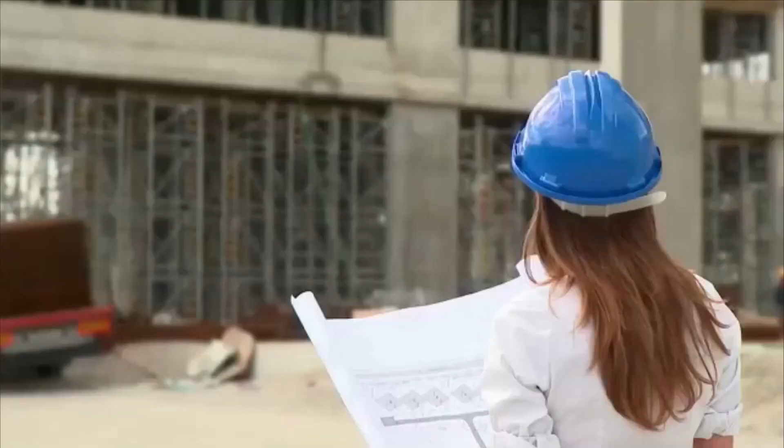The formation of these islands involves a lot of planning and designing, and this may take several years of planning and consultation. Civil engineers, architects, and town planners collaborate to draw out plans that would make the island sustainable, aesthetic, and functional. This stage includes the assessment of the environmental effects, the evaluation of the project's viability, and the creation of the project's prototype in 3 dimensions.

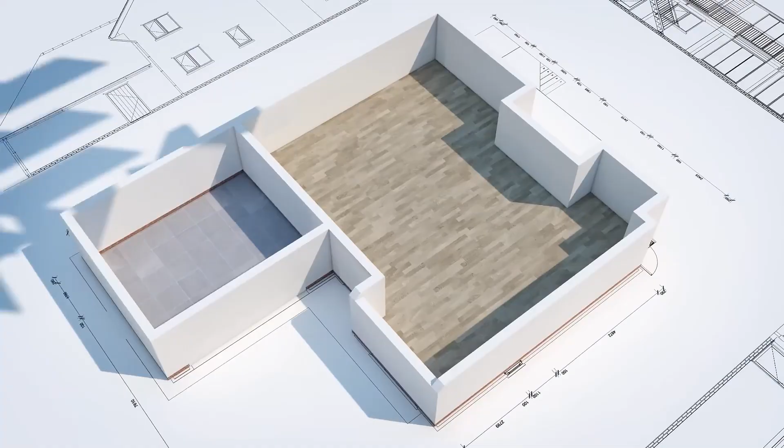For example, the shape of Palm Jumeirah is in the form of a palm tree to ensure that as much land touches the water as possible, and also to develop a unique structure that can easily be seen from space.

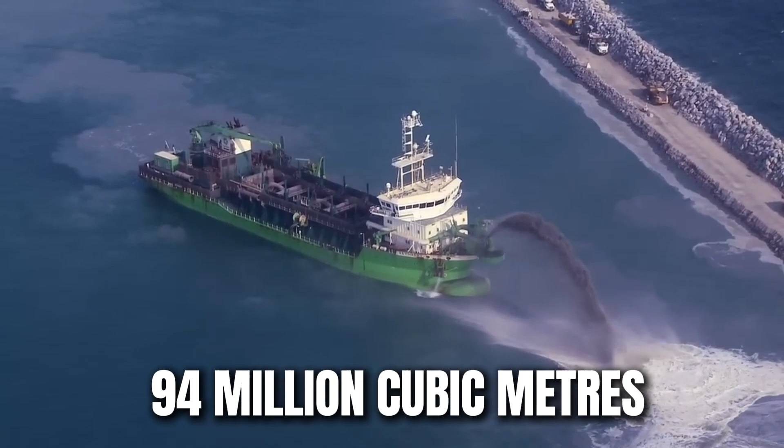After the designs, the next process is land reclamation, which is the process of creating new land from the sea. This is done by taking sand from the seabed and then pumping it to the required area, known as dredging. In the case of Palm Jumeirah, more than 94 million cubic meters of sand were taken from the Arabian Gulf.

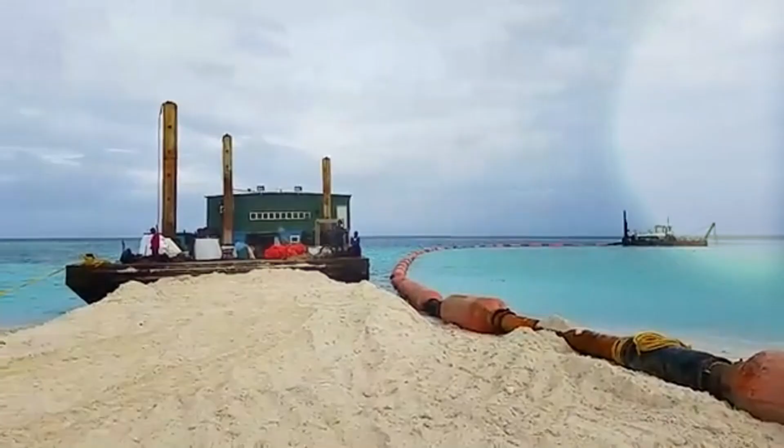The sand is then sprayed on the site through a method called rainbowing, which aids in shaping the island. In order to prevent the newly formed land from being eroded or attacked by storms, rocks are arranged in such a manner that they surround the sand.

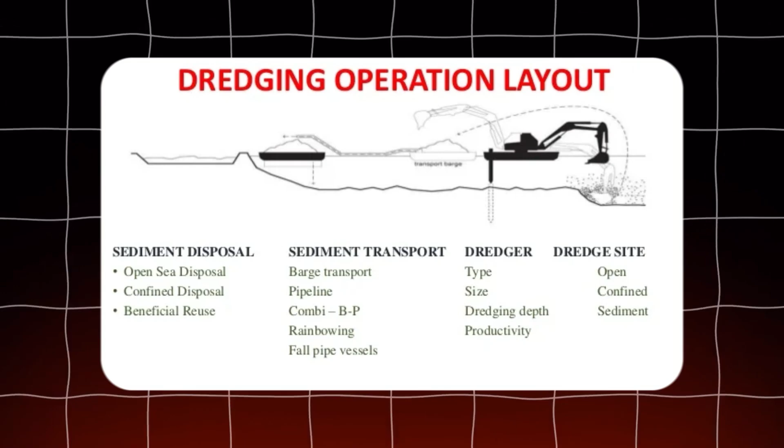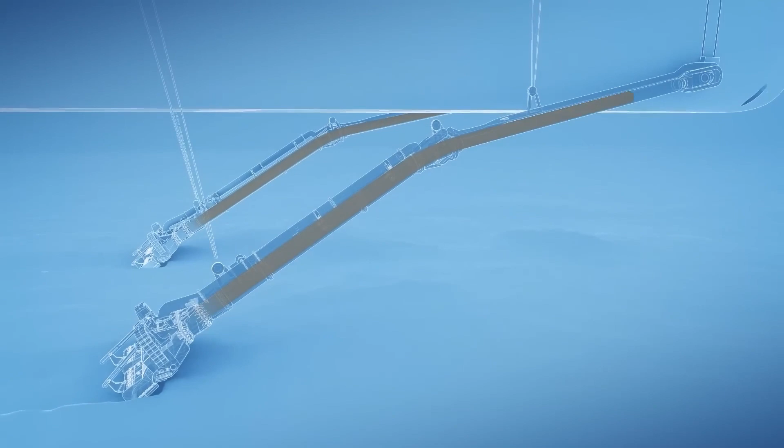Dredging is a very technical and intricate process. There are specific boats called trailing suction hopper dredges that are used to scoop sand from the sea bottom. These vessels have suction pipes that suck sand and water and transport them to the reclamation area. The sand is then deposited in layers, and this gradually forms the land.

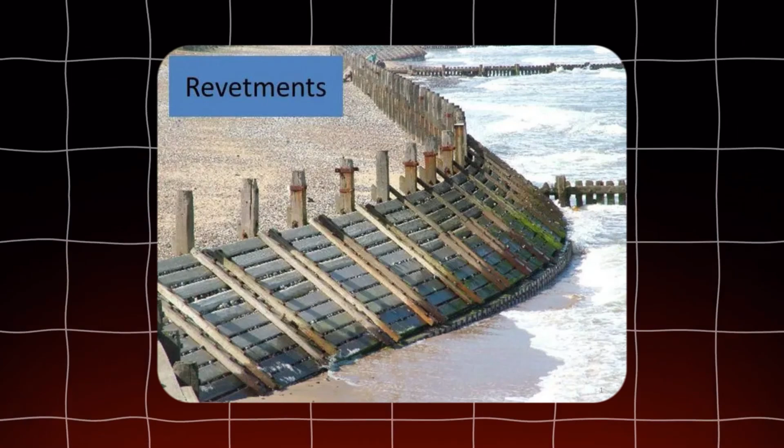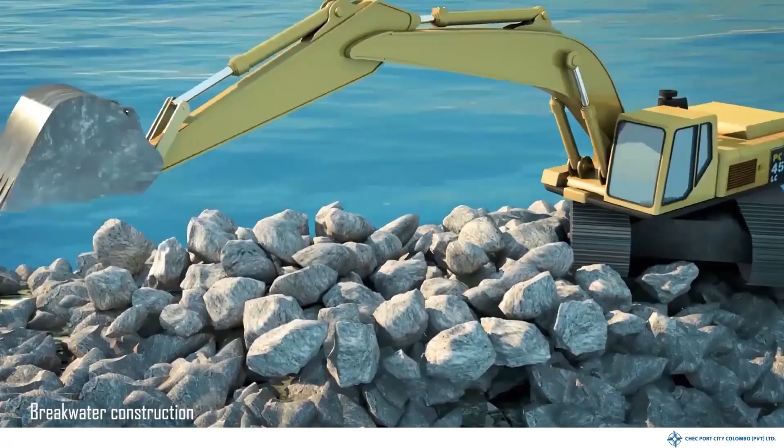This term is derived from the manner in which the sand and water mixture is sprayed to form an arc like a rainbow. The rock barrier constructions are well engineered. These are barriers commonly referred to as revetments or breakwaters due to their importance in protecting the islands from the force of the sea. The rocks are chosen in a proper manner and placed so that they can effectively reduce the wave energy and thus avoid erosion of the artificial land, while also offering long-term stability to the artificial land.

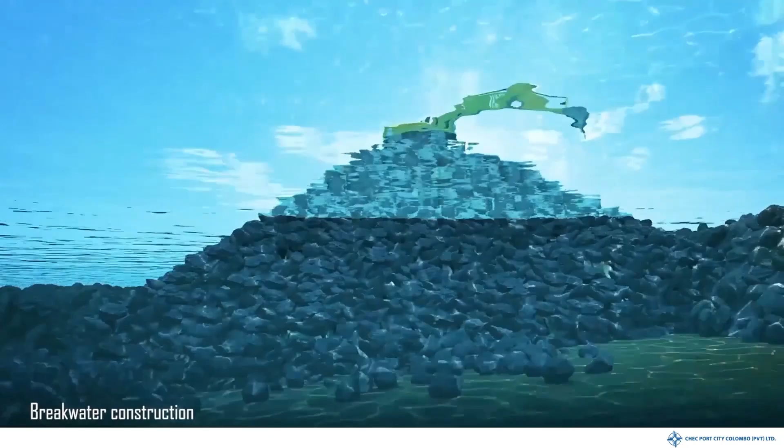After the formation of the basic landform, attention is turned towards the construction of the infrastructure. This entails the construction of roads, bridges, and other infrastructural facilities like water, electricity, and sewage systems. Sophisticated technology and construction techniques are used to enhance the durability and sustainability of the buildings.

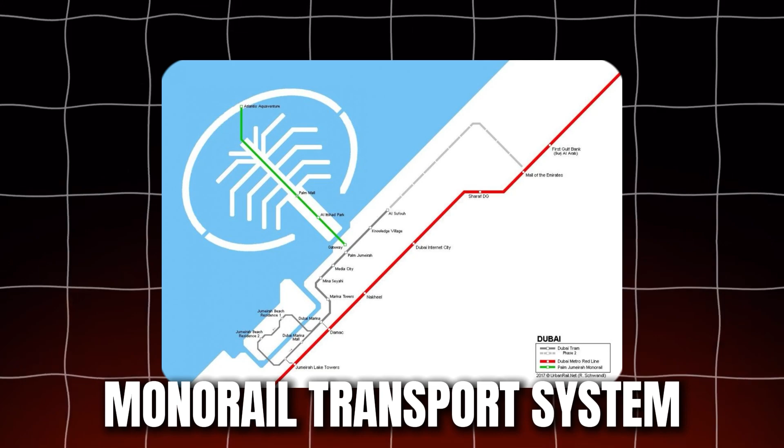For instance, Palm Jumeirah has a monorail transport system that links the island to the mainland, making it easily accessible to the people staying there as well as tourists.

Construction on such terrain is not easy because the land is reclaimed from water bodies. The engineers need to take into account the settling behavior of the land, since the newly formed land tends to settle or become more compact.

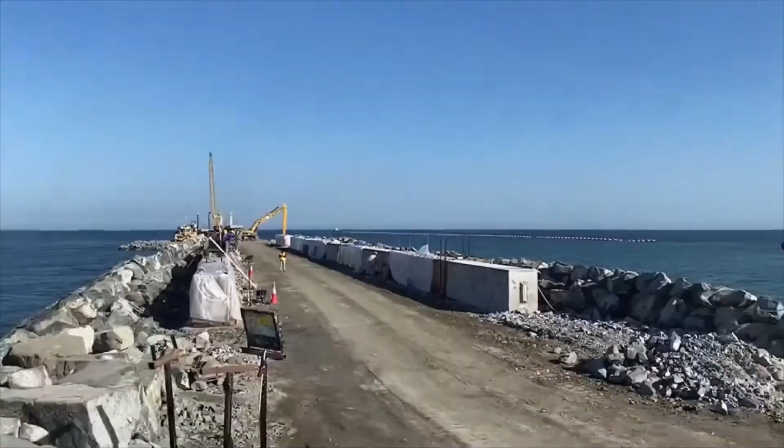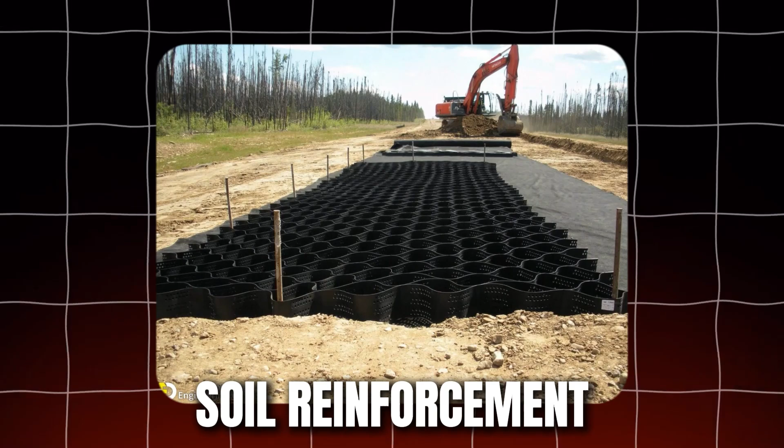In response to this, geotechnical engineers undertake soil investigations and also employ methods of improving the ground. These may include soil reinforcement, the application of geotextile materials, and even deep soil mixing to make sure that the ground is stable enough to support structures.

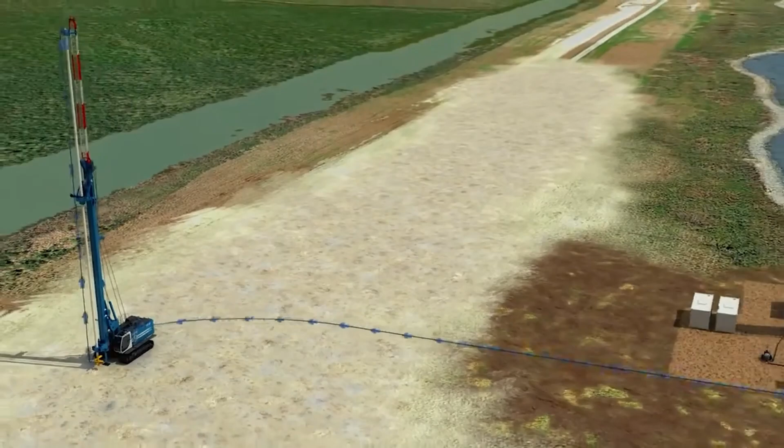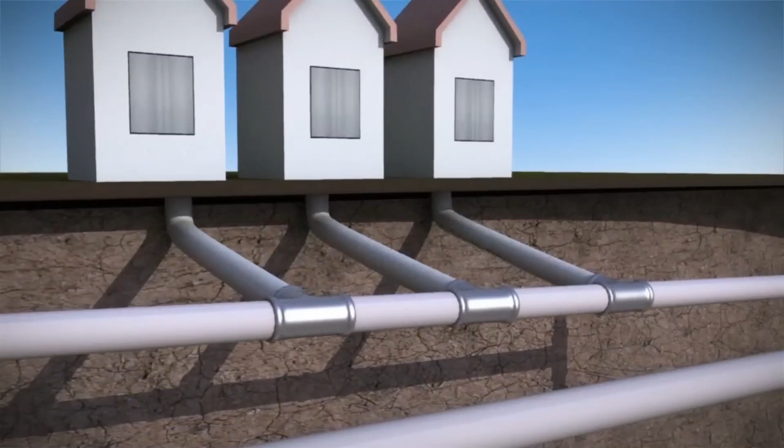Another important factor is the provision of utilities. Due to the fact that the islands are luxurious, the facilities must be reliable and efficient in their functionality. Modern water and sewage treatment plants are usually constructed to provide a steady source of clean water and proper means of waste disposal.

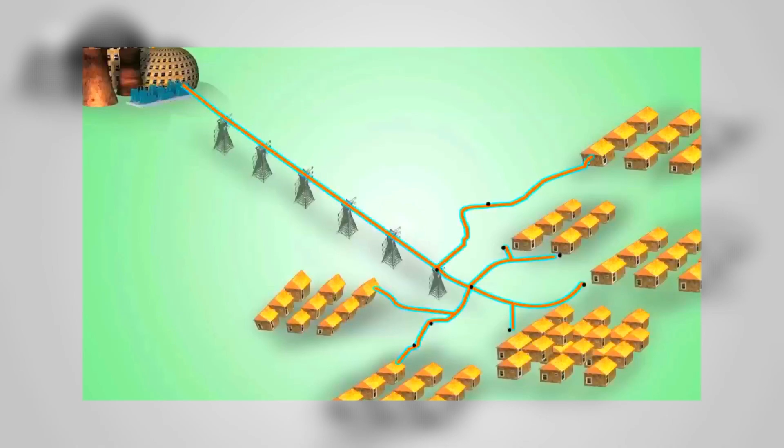Electricity networks are built to deliver large amounts of energy and are integrated with renewable energy where feasible.

Dubai's islands are among the most famous projects in the world. Palm Jumeirah has luxurious accommodation facilities such as Atlantis, the Palm, and other residential properties and shopping centers. The World Islands are a cluster of 300 islands in the shape of a world map that contain private resorts and villas. Blue Waters Island has the Ain Dubai, the tallest observation wheel globally, as well as entertainment and shopping facilities.

Atlantis, the Palm, is one of the main attractions of Palm Jumeirah and provides guests with luxury and entertainment. It has an underwater aquarium, a water park, and a variety of restaurants to suit the international clientele. The architectural design and luxurious facilities make it an embodiment of the city's desire for quality.

The World Islands project is one of the examples of the imaginative spirit of Dubai. Every island is planned to depict a specific country or a continent, which provides different themes and concepts. These islands are for the elite and the wealthy who want to be left alone and get to enjoy the best of what they're offering in terms of accommodation and services.

The other spectacular project is Blue Waters Island, which hosts Ain Dubai, the world's largest observation wheel. This engineering marvel gives a vantage view of the city and the Arabian Gulf. The island also offers a blend of shopping, dining, and entertainment facilities, so it's among the most preferred places for people in the region.

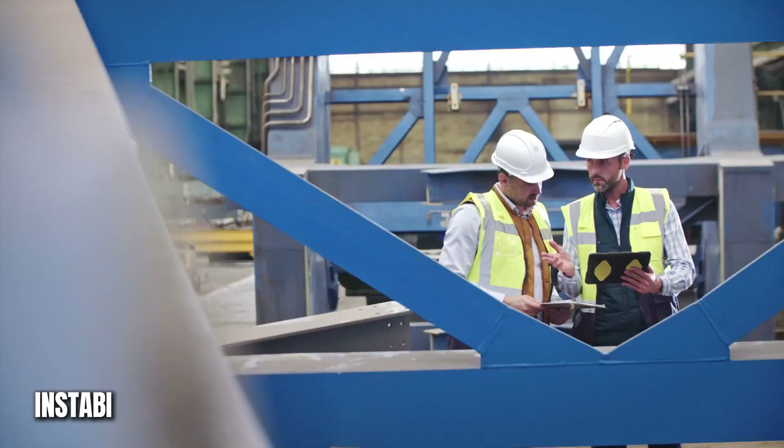It's not as easy to build these islands as it may sound. Engineers have to deal with challenges such as the instability of sand, water flow, and general marine conditions. These problems have been solved through the application of geotextile membranes to fix the sand and the application of hydraulic engineering. Further research and development guarantees that Dubai is always ahead in the technology of constructing islands.

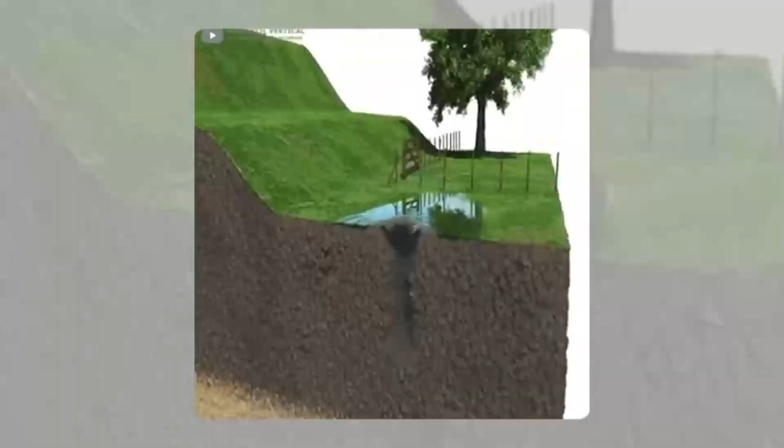It is crucial to use geotextile membranes in the construction of the sand used in land reclamation. These are fabrics that are used in between sand and rocks to offer support and to avoid the wearing away of the layers. They also aid in drainage, thus assisting in the preservation of the reclaimed land.

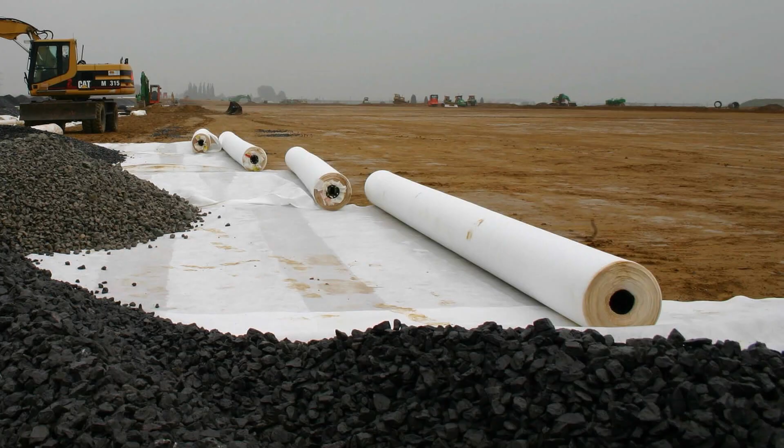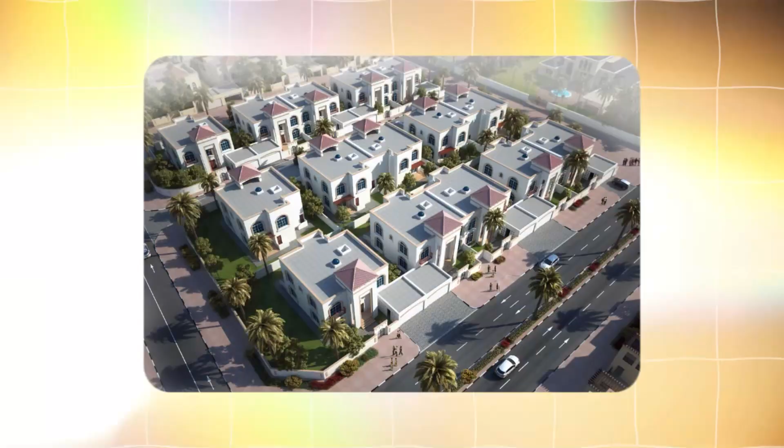Dubai's ambition does not end with the islands that have already been constructed. Further plans include the continuation of the construction of more coastline for the city and the promotion of the city's image on an international level. Further projects are residential compounds, entertainment centers, and environmentally friendly tourism facilities. The vision of Dubai is to build a city that is innovative, luxurious, and at the same time, sustainable.

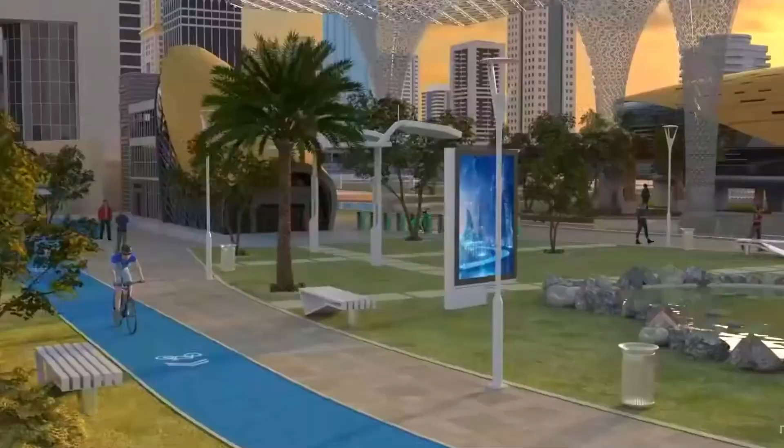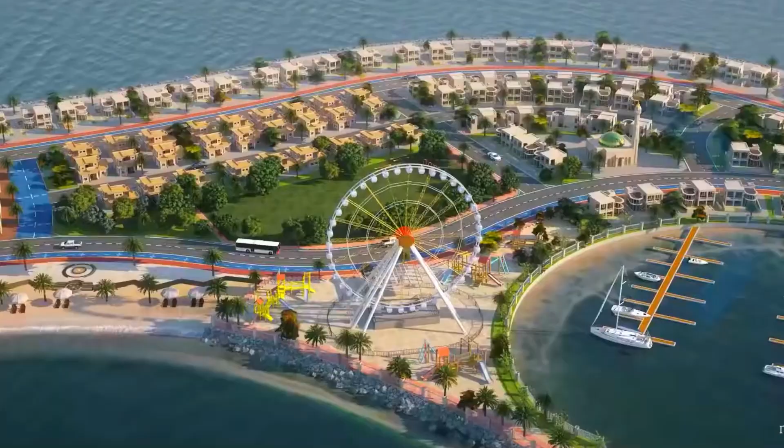Among the future projects, one must mention the construction of new residential districts on artificial islands. These communities are intended to be modern and luxurious, with environmentally friendly homes, green areas, and state-of-the-art utilities. The aim is to develop compact, sustainable communities that will be the benchmark for modern urban environments.

Dubai is also keen on diversifying the attractions for tourists by creating new entertainment cities on its islands. These hubs will include new generation attractions, cultural tourism, and other facilities that will attract tourists from all over the world. Thus, Dubai is trying to diversify its tourism in order to remain one of the leading tourist destinations in the world.

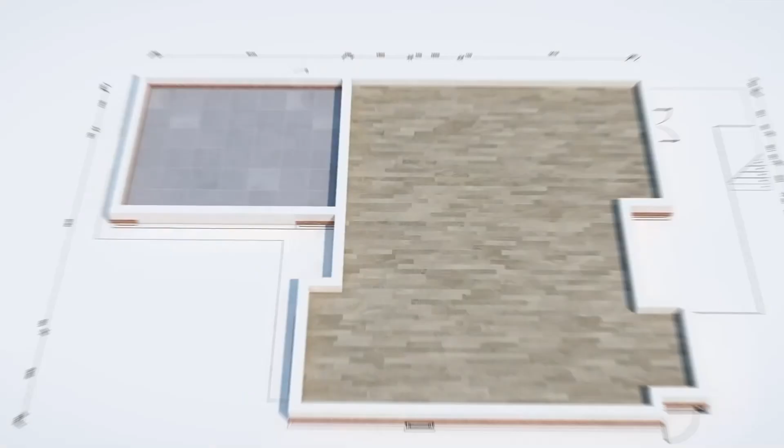Starting from the concept and design stages, through the choice of the method of land reclamation, and up to the principles of sustainable development, the story of how Dubai creates its islands is a story of vision, innovation, and determination. These islands will only grow with time and will surely encourage generations to come to think big and to achieve the impossible. We hope you enjoyed the tour of the man-made islands of Dubai.